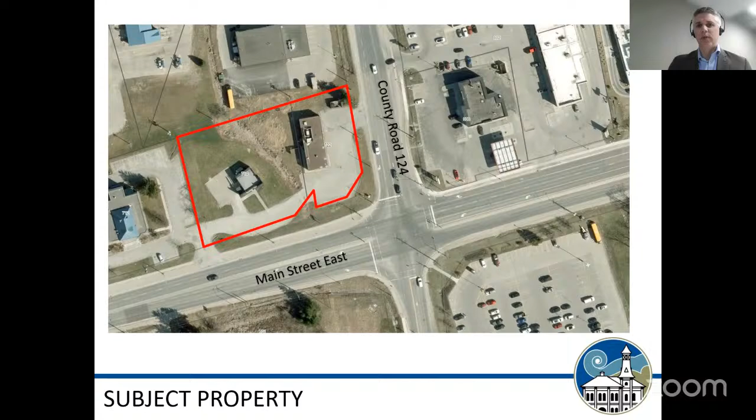That setback is one of the key reasons why these variances are requested. It's a requirement of the MTO, and as a result, there is less space to achieve parking and circulation. The area within that zone does not count towards the minimum landscaped open space area and the planting strip requirements.

The reason for that setback is that MTO protects either side of their highways when new development comes about in case of a future widening. There are no planned widenings of the highway in this location. It is also not in the known or foreseeable future as to when and if the right-of-way might be widened.

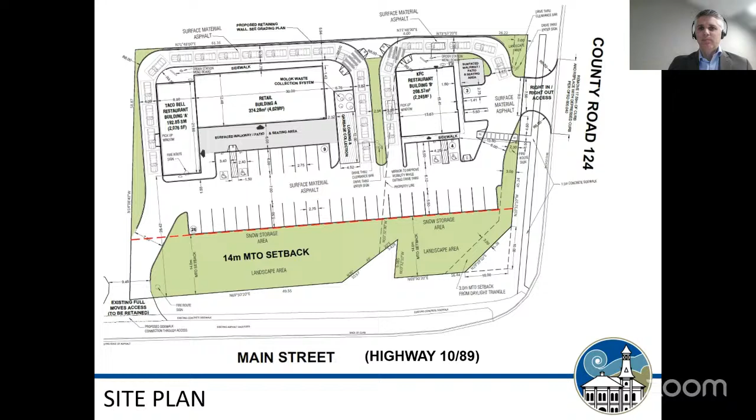So there are 5 variances that are requested. The first 4 are fully discussed in our report. The minimum number of parking spaces required based on the floor areas is 46, but as mentioned, due to some of the setback requirements, they've maxed out the parking area and only been able to accommodate 42 with the site design.

The driveway or parking aisle width is required by the bylaw to be 7 meters wide for two-way traffic, but there are 2 locations, again, that are constrained on site that are less than 7 meters, and I'll show those in a moment.

A planting strip is required between the parking area and County Road 124, and the bylaw requires 3 meters. A small section of that planting strip is proposed at 2.3 meters, again, relative to access constraints.

The total landscaped open space is a function of the MTO setback as well, because MTO has requested that anything required to satisfy the zoning requirements should not be dealt with in the 14-meter setback area.

The reason for that, again, is if that widening of the highway is taken in the future, they don't want to put the property out of compliance with the zoning bylaw by virtue of a highway widening. So a reduction in the landscaped open space is requested from 15 to 9%.

And then at the time we wrote our report and when the application was filed, some details around the retaining wall had not yet been solidified.

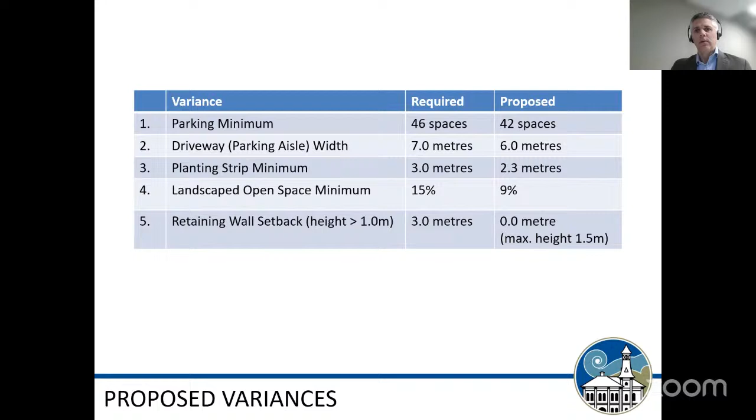So just to detail the parking a little bit more, you can see the parking areas have been consolidated into the south and easterly parts of the property. The majority of the parking will be in front of the two buildings along Highway 89, and a smaller row of 3 parking spaces on the east side of the property.

We did do a careful review of the number of parking spaces proposed. A couple of key considerations with that. One, the applicant did a survey of similar sites in Orangeville and other municipalities, and also considered the existing plaza at the north end of Shelburne, the Summerhill Plaza. In those cases, the parking ratio provided was the same or fewer parking spaces provided for similar uses, and they are functioning fine. So the work that they did recorded maximum parking use, number of spaces provided per floor area, and it does demonstrate that 42 spaces is adequate for the proposed uses based on those precedents.

That's equivalent to a ratio of 1 space per 18.5 square meters of gross floor area. And Summerhill Plaza, as an example, was 1 space per 17.5 square meters and went through a similar variance process.

Another consideration relative to that is the nature of the uses with the drive-through pickup option does mitigate some of the parking requirements. Number of employees, of course, is another consideration, and that's not expected to be a high number that would require any more than, say, a quarter of the parking spaces for staff. With the food takeout, delivery, and drive-through focus, that certainly limits the in-restaurant dining, and even for the in-restaurant dining, the turnover time in these types of restaurants is usually quite quick.

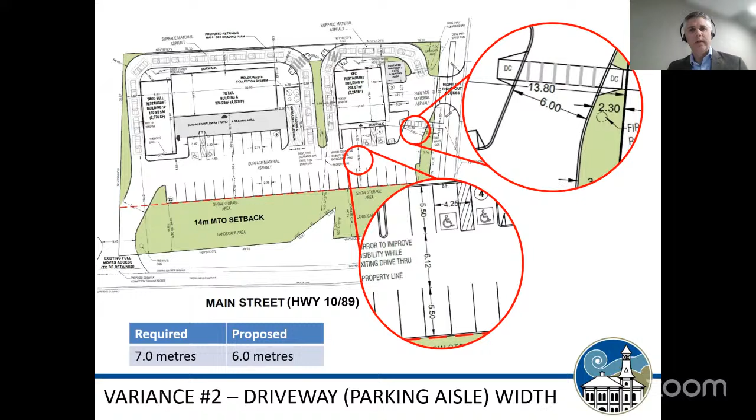You can go to the next slide. So the key consideration with all of this is, can the largest vehicles that will be traveling through and onto the site, or potentially have to travel through or onto the site, have adequate access? One of the key considerations is that the minimum fire route width under the Ontario Building Code is 6 meters, and they are still providing that.

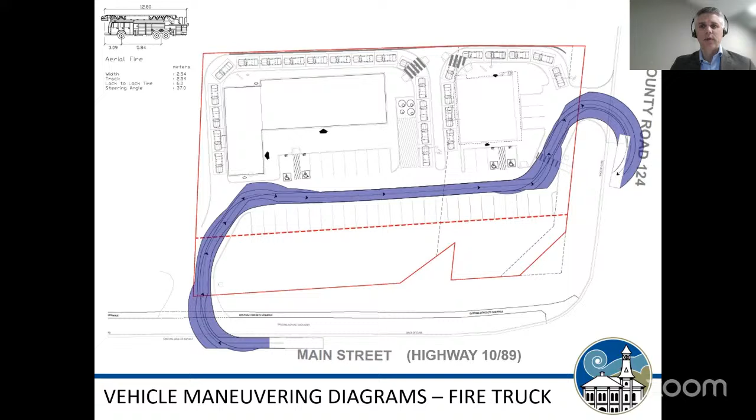And the next slide shows again, different routing for the fire truck, and it's accommodated through the proposed parking aisles and driveways. The next slide shows the same information for waste pickup. There's a centralized waste enclosure where the waste vehicles would pick up the waste through private collection. So this would not be a county service, but a private collection on site.

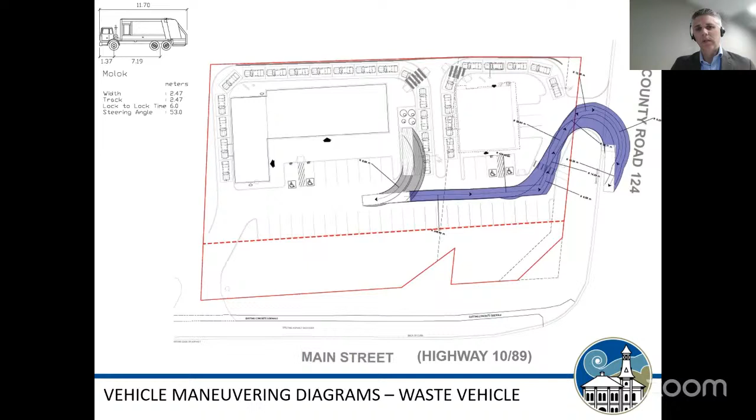And the next slide shows a different route again for the waste vehicle. Next slide shows deliveries. So in that central area again, that would dual function as a loading space for any deliveries for the retail and restaurant uses on site, and no problems in terms of accommodating the delivery vehicle turning movements. Next slide shows the same with a different route.

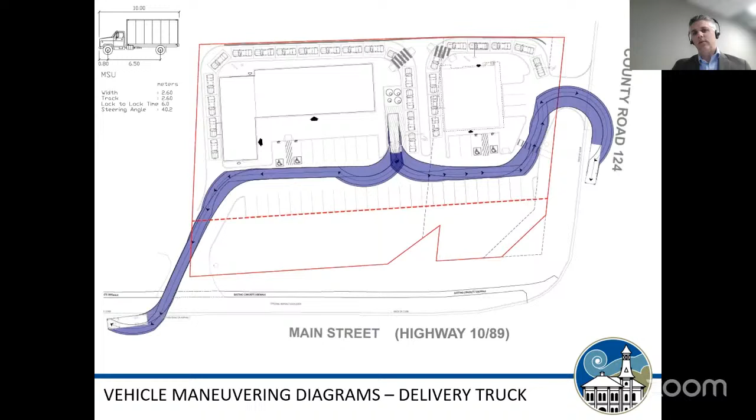And then the last two turning movement diagrams just illustrate that there's adequate space for standard passenger vehicles moving in both directions. The next slide. So it just covers all the different turning movements that may be considered and proves that there are no constraints with the narrower driveway and parking aisle widths.

There is one comment with respect to a pinch point in the southeast corner that we're still working through in the site plan process, but it's not expected to alter the variance requirements at all. That comment stems from the engineering review, which flagged that if a delivery or waste vehicle is coming into the site at the same time as a passenger vehicle is trying to go through that space, there is a bit of a pinch point. One vehicle would hopefully wait for the other. So that may affect the curbing design a little bit in one part of the site, but doesn't affect the variance.

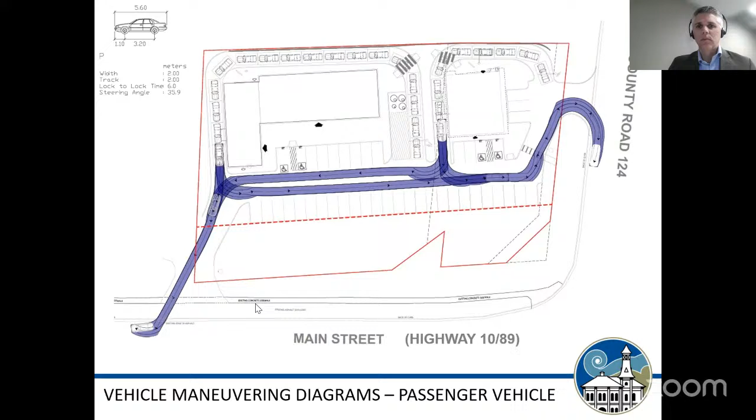The other reason for the design as you see it is to ensure it's barrier-free accessible. Within the county right-of-way, crossing through the area labeled as right-in, right-out access, a sidewalk will be added as part of this development on the west side of County Road 124, connecting to the intersection at Highway 89. A walkway from that sidewalk into the site will accommodate pedestrians coming through the planting strip area, with curb depressions on either end sloped to ensure accessibility for wheelchairs and strollers. So the reason that part is narrower in terms of aisle and planting strip is to make sure the barrier-free accessible design is accommodated.

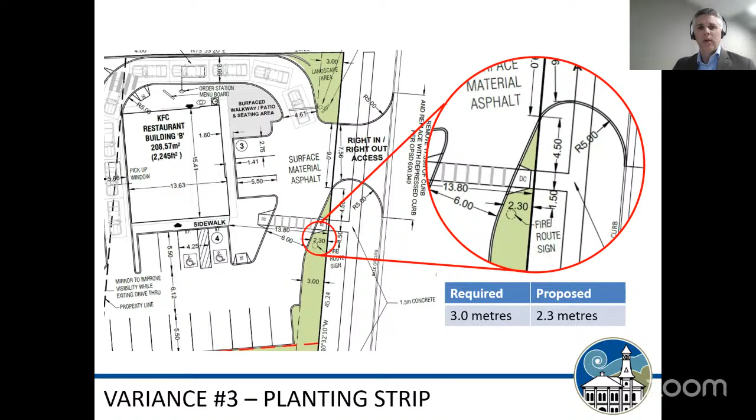The overall landscaping of the site area, when you include the 14-meter setback, is closer to 30% of the area. But because of potential future highway widening, MTO doesn't want that 14-meter setback area relied upon for future landscape requirements. If that entire 14-meter area were removed in the future for non-landscaping purposes—though I don't think that's a very likely possibility—the net landscaping on the remainder of the site would be 9% of the site area, which is reasonable considering how much land is lost for the setback. Overall, the landscape plan is robust and adequate for this site based on the review of the related site plan application.

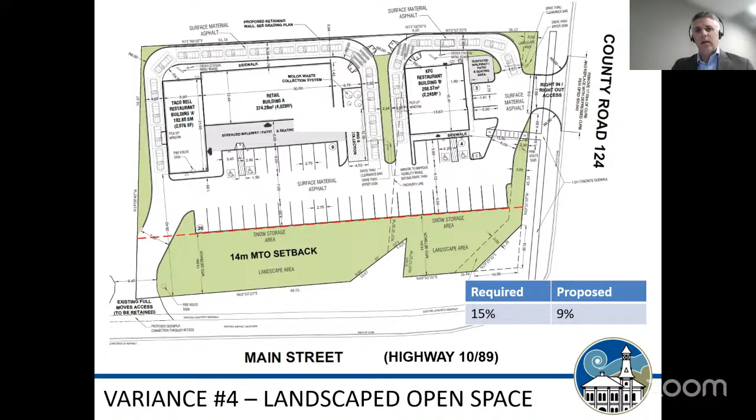On the north end of the property, this is the variance not covered in my report, as the retaining wall details were still being sorted out. The red line shows where a continuous retaining wall of varying height would be constructed to make sure adequate flat space is available on the north side for the two drive-through lanes. The retaining wall at its highest parts would be about 1.5 meters. That detail is being confirmed through the grading plan and other information as part of the site plan process. But because it exceeds a meter in height, zoning would normally require it to meet the side yard setback of the zone, which is 3 meters in the C3 zone.

In this case, the variance request is to allow that retaining wall to be right along the lot line. We have considered the impact of that, and really there is no significant impact we can see, because the 6 meters immediately to the north of the retaining wall is an existing municipal sanitary sewer easement where no buildings or structures can go anyway. The buildings on the property to the north are quite far north of that retaining wall, and as mentioned, wouldn't be able to build in the sewer easement area anyway. So that area is just open land for sewer and drainage at this point, and we're not expecting any significant impacts.

This would be very similar to what you see on the north side of Wrigglesworth Plaza, where there's also a retaining wall to accommodate that drive-through. On top of the retaining wall would be what's referred to as a guard wall—basically a nicer-looking masonry guardrail that functions to prevent any vehicles from accidentally slipping out of the drive-through lane down the slope.

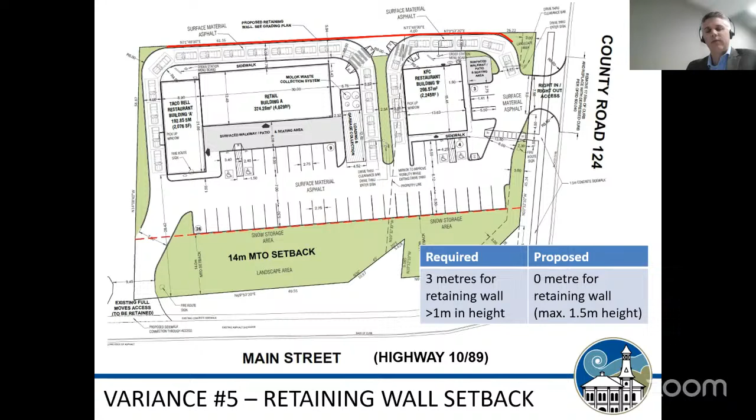So I think that covers a quick overview. There's a lot more information, as you can see in the volume of my report, and there's a lot of attachments and further information that was provided through the site plan process.

Before I go over the conditions, I wanted to mention we received some public comments. I'm not sure if those have been circulated to the committee, but to provide an overview, those comments were received on December 6th from Randa James. There were questions about why it's referred to as the approved site plan in the first condition. The answer is the site plan is still under review, so we're suggesting minor rewording to say this shall be in conformance with an approved site plan, or that a site plan approval is required in conjunction with this.

Basically, the site plan and minor variance go hand in hand, and the site plan provides more details to demonstrate how the variance, if approved, would be met.

There's also a typo that the member of the public flagged where it indicates a parking rate of 1 space per 19 square meters, but the actual ratio is 1 space per 18.5 square meters, and that's the variance that's been requested as summarized in our report.

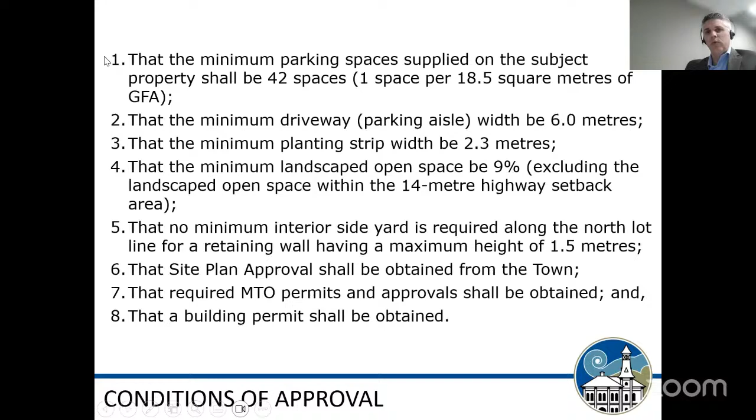So I think that summarizes what I wanted to present. Again, the conditions of approval here, slightly different and reworded from what's in my report, cover the limitations of the variance, making sure it's specific to this site plan approval, the uses proposed on this site, and the parking ratio proposed for those uses. It isn't a perpetual thing that could be applied to any future redevelopment—it's exactly for this site plan approval.

So with that, I'll pause there and would welcome any questions from the committee. Thank you, Steve. Questions from committee members? Len.

Thank you, Mayor. Steve, I've got a question about the traffic flow. Similar to what happens at the corner of Main Street and Greenwood, what is to prevent vehicles from coming south on 124 and using that parking lot as a shortcut to go west on 89? And what impact does that have on the two exits for the restaurants?

And what if a KFC customer comes into the drive-through and wants to continue west at a similar time when a Taco Bell customer is coming to the drive-through and wanting to travel north on 124? Could we not eliminate those 4 parking spaces at the exits of both drive-throughs to give more room to make those turns should they be required? Or is it going to be a one-way flow?

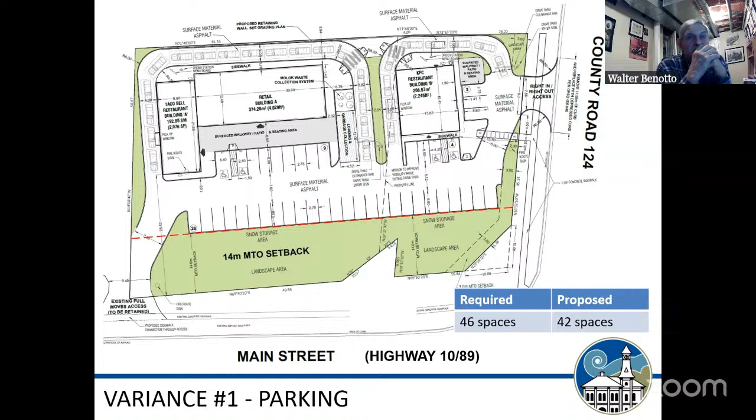Sure. Good evening, everybody. Nice to see you, and through you, Mr. Chairman. That's correct. The loading and garbage area is intended to be shared. It's an efficient location that allows for the ability to serve both buildings. Yes, the trucks would pull in there, and then they would be offloaded, and the goods transported in either direction to either restaurant or to the retail buildings.

One thing to consider, the delivery trucks wouldn't be able to use the drive-through if that was ever contemplated by a driver looking for a shortcut. There's usually a height restriction, a bar above the drive-through, so the truck couldn't pull in there. But yes, we'd be relying on, as Steve said, the standard delivery protocol where they offload and then walk or cart the materials to each restaurant.

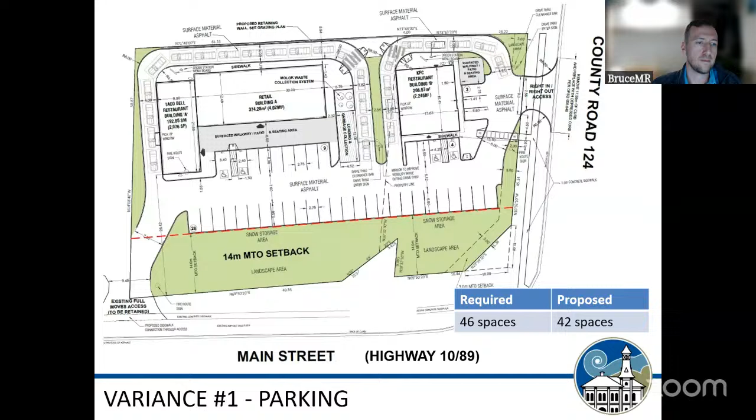Okay. Member Wagner. Thank you so much.

This, in my opinion, is a disaster waiting to happen. I have no problem with pretty much any of the requirements here, except the fact of the 6 meter aisle. As Member Gouchardy already mentioned, hopefully not everybody will try to cut through, but there are going to be people who cut through. You can guarantee it. And then we have an entrance and exit right beside the entrance to a drive-through.

So now you're going to have the potential where you have a lineup happening in that drive-through, that's going to extend potentially beyond the 3 parking spaces that are there, that Mr. Gouchardy already brought up. So blocking in those people who are using those spots, and then not facilitating free flow movement of those entering and exiting from that entrance off of 124.